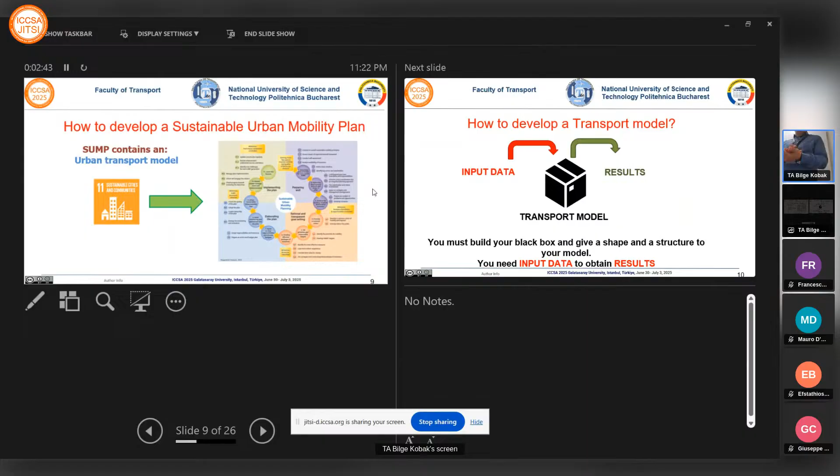How is this kind of strategic document developed? There are four steps. First step is preparing, to identify action and goals for sustainable urban mobility plans, to elaborating the plans, which include normally a transport model, because if you want to test some action, some measure, the simulation model is a good tool, because it's better to know what happens if I build a new trip in simulation like in reality, and to implementing the plan.

But to develop this transport model, I need to use our mathematical knowledge to write the relation, to calibrate data and to obtain the results. But the most important is to have some good input data, because if you have good input data, also results are good. But if you have bad data, the results are certainly bad.

So which kind of data do I need normally? I split it in two components. Static data, and we can obtain information from national, regional, and local authorities. I need information about public transport, and of course I can use previous studies to collect this kind of information.

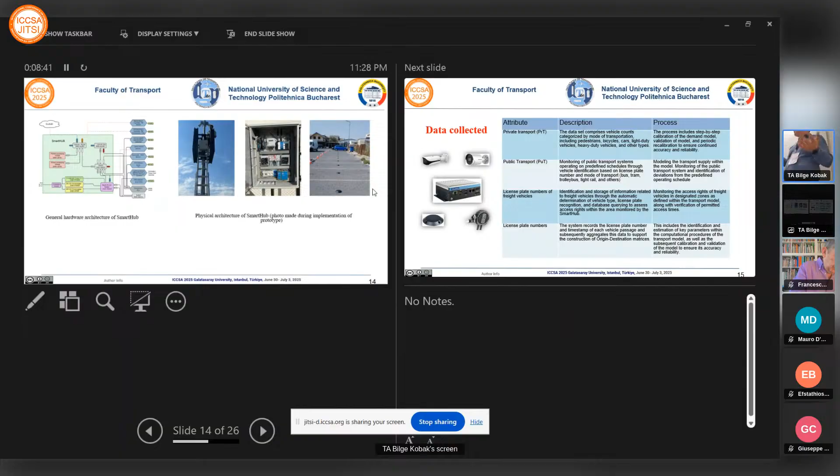Which data do we collect? We collect data about private transport: counting how many cars, bicycles, and private vehicles. Data about public transport, because I want to know when the bus arrives, if it's on time, delayed, or early. We also collect the license plate number of freight vehicles, since sometimes there are restrictions, and I want to know if vehicles respect them. The equipment can also pair license plate numbers to obtain an origin-destination matrix, to calculate travel time, and to see congestion or delays in traffic.

We also have statistics for a sustainable urban mobility plan for medium cities located near Bucharest, where our project was implemented. We built the transport model, developing a network model, demand model, and impact model.

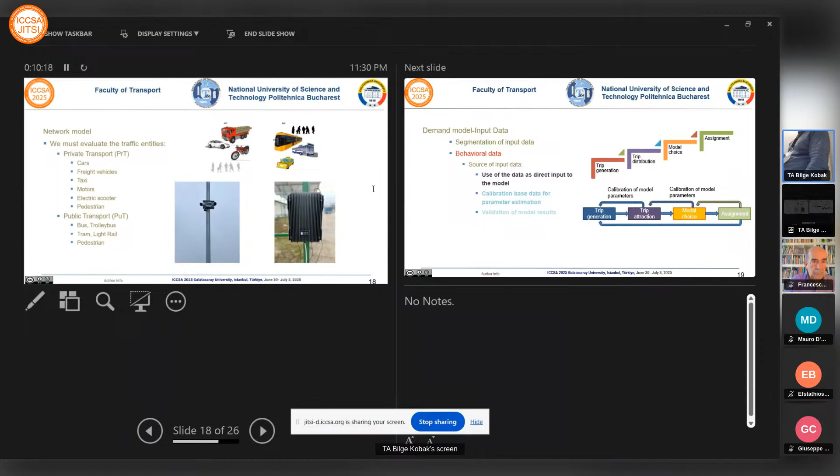We classify vehicles into private transport — car, private vehicle, taxi, motorbike, electric scooter, pedestrian — and public transport. The demand model was a typical model in four steps: trip generation, trip distribution, modal choice, and assignment.

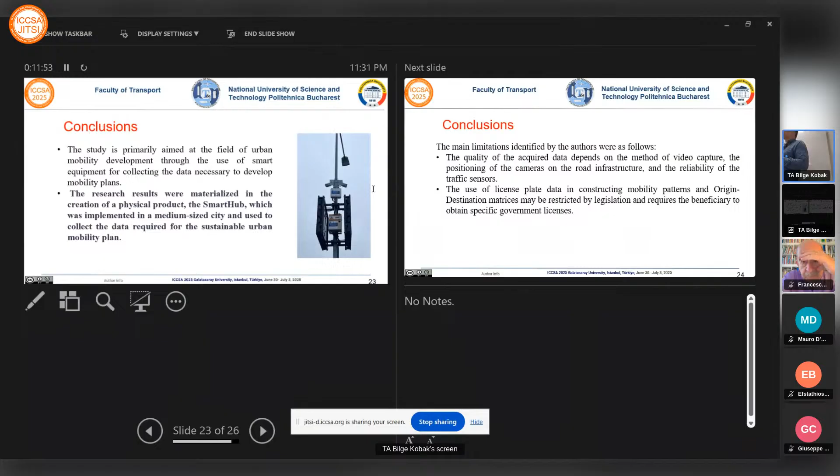Some conclusions: innovation appeared in our research because recently the rise of artificial intelligence helped us develop new technology. The most important outcome is the research results — we obtained something physical, this equipment, and we can use it.

Of course we have some limitations. We observed that it's very important how you position the camera in traffic, because if it's not well oriented, you can have errors. Weather conditions can also affect recording.

Something special — I don't know about other countries, but in Romania, collecting license plate data isn't easy; it's not legal without authorization. You must obtain a document from the authority. And when we publish the results, we anonymize the data to hide the plate numbers.

Future research will focus on developing a dynamic model for traffic monitoring and control. We want to export the results to a system that can control traffic light intersections, so we can optimize the traffic flow. Okay, thank you.

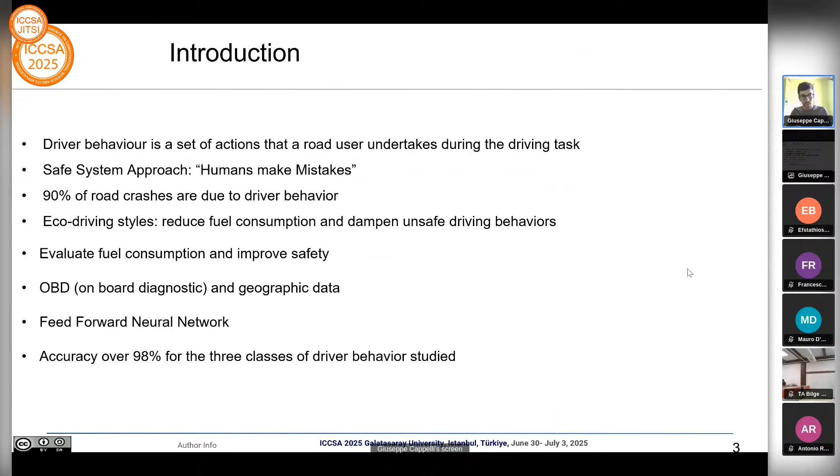The first step in this methodology was to select the best dataset to use. After studying and reviewing the most used datasets, we decided to choose the Davis Driving Dataset 2020, because it contains almost 51 hours of driving recordings over 4,000 kilometers of driving. Another advantage was that all this data was georeferenced, so we also have GPS information on the data collected during this experiment.

In this slide, I show the main variables retrieved from the OBD data in the Davis driving dataset: engine speed, brake pedal status, accelerator pedal position, vehicle speed, and so on. This dataset was the largest available, and also contained georeferenced information, which was used to combine this dataset with external information retrieved from OpenStreetMap, for instance.

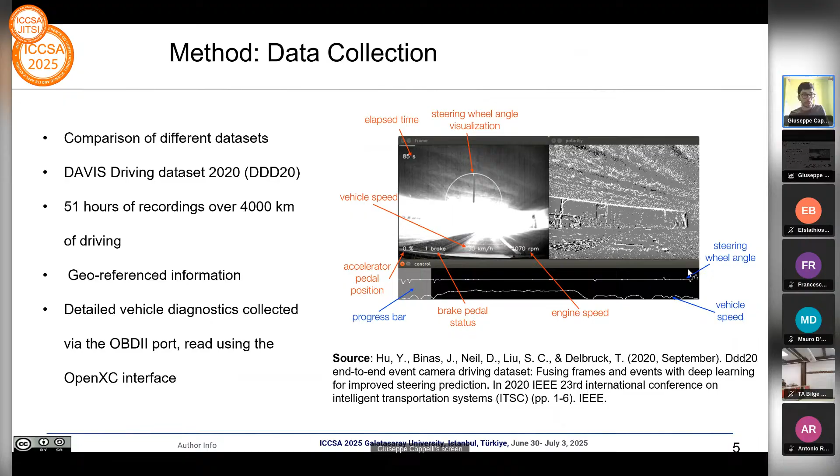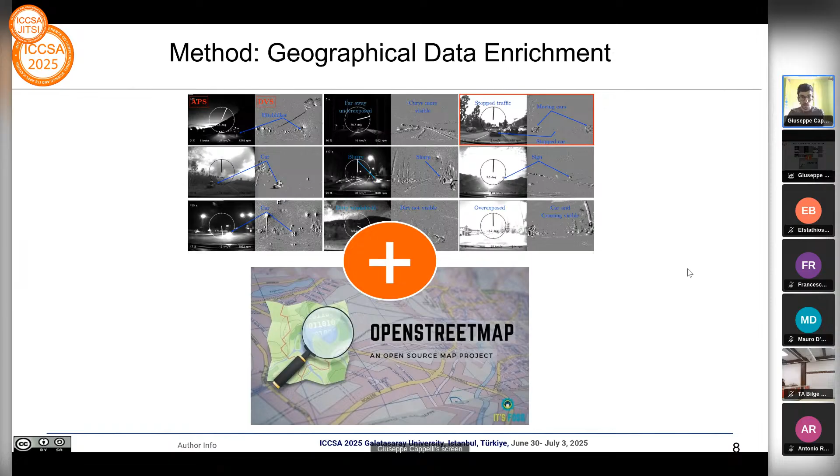One of the main and important steps of this methodology was the geographical data enrichment. We tried to merge data from the OBD with OpenStreetMap data, because the aim of this study and paper was to understand the role of the external environment on driving behavior, which was an essential part of this research.

After that, we trained and tested a multi-layer perceptron neural network, an artificial neural network that works by emulating the brain's neural process. With this model, we were able to classify driving behavior according to the three classes identified with the k-means algorithm, and we saw that the performance of this model was very high.

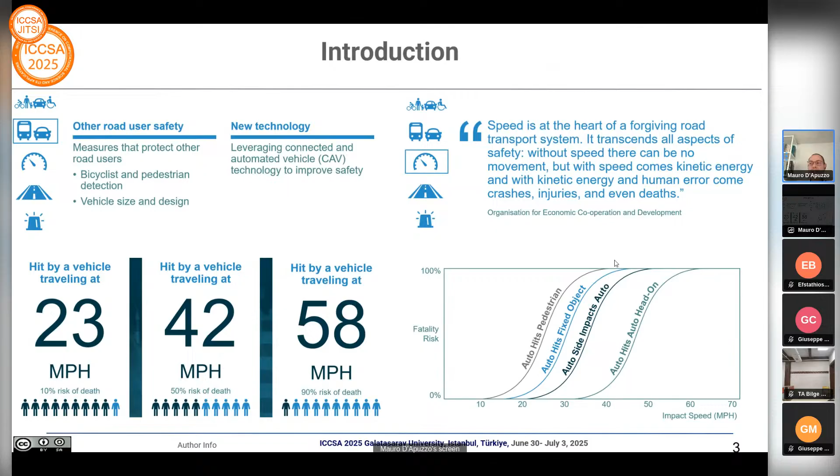According to the impact speed, you have an increasing severity and death risk when a vulnerable user, a pedestrian, is hit by a vehicle. Usually we develop severity curves, like those shown on the right part of this slide. As you can see, there are several severity curves according to the crash scenario we are focusing on.

When you want to mitigate speed in urban areas, you can have different tools and measures. You can foster sustainable mobility, set up cycle lanes and so on. But in a more traditional approach, you can use typical traffic calming measures. Among these, we can identify horizontal based traffic calming measures, such as chicanes or road narrowing, whereas we also have vertical based traffic calming measures, such as road humps, speed tables, or raised pedestrian crossings.

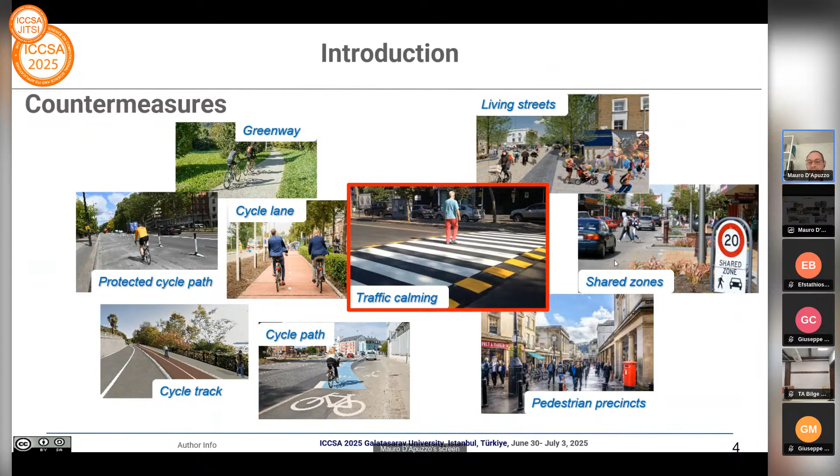Or you can have perceptual traffic calming measures, such as optical bars and so on. We want to focus on vertical traffic calming measures, and more specifically on raised pedestrian crossings. The interest for this specific measure is that in Italy, according to Italian rules, this kind of traffic calming device can be installed practically everywhere, compared with speed humps, which undergo some installation restrictions. Speed humps can only be installed in residential areas, whereas raised pedestrian crossings can be installed practically everywhere.

Our research study starts from analyzing the dynamic interaction that a vehicle experiences when crossing a vertical traffic calming device, such as a raised pedestrian crossing, analyzing the vibration level that the driver experiences, since this vibration comfort will govern the vehicle speed when crossing the traffic calming device. So we developed theoretical dynamic models in order to identify the acceleration history in terms of vibration and comfort that the driver is experiencing.

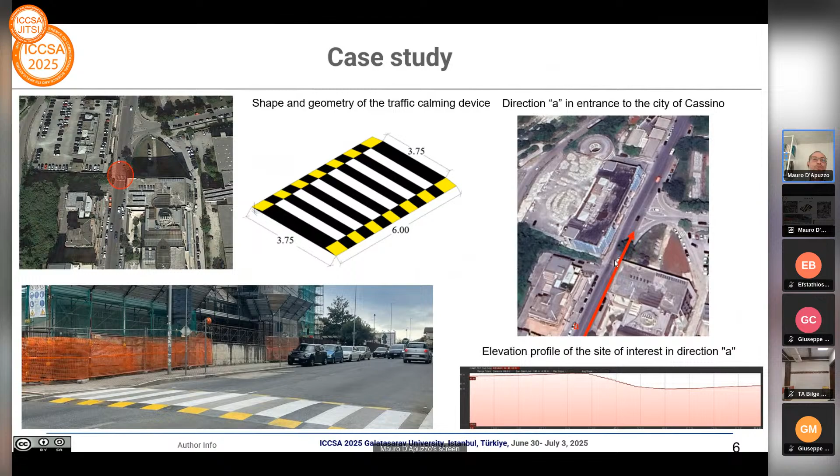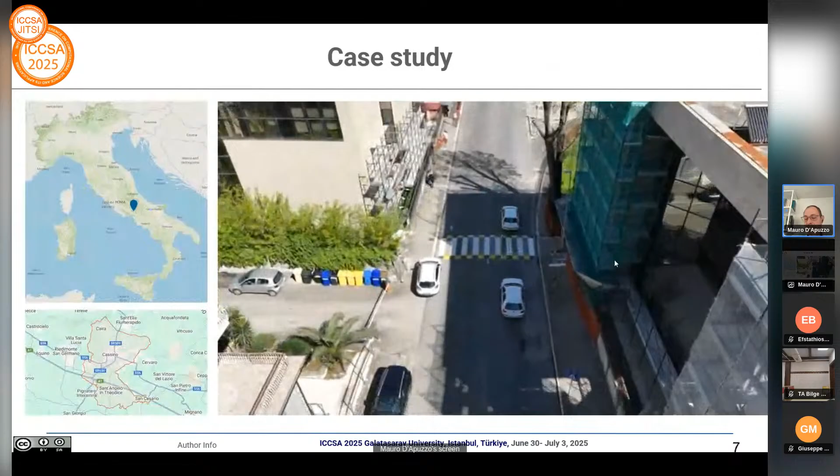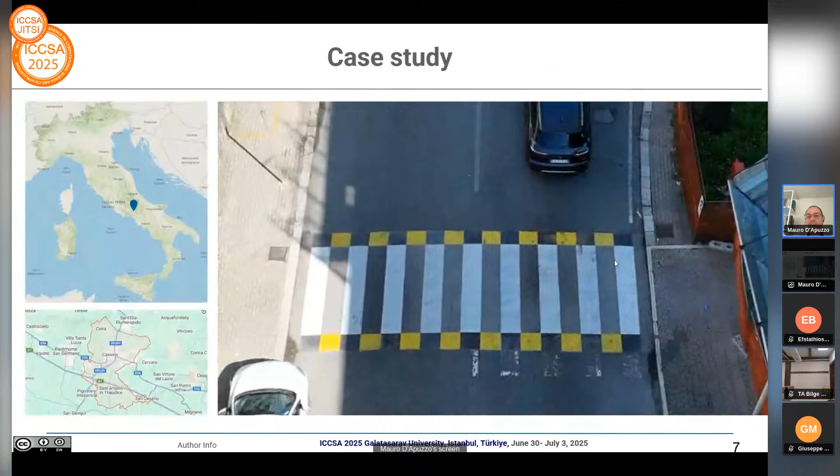As a matter of fact, as I told you, we are talking about a raised pedestrian crossing. So we need to look through some experimental data to gain evidence of this different behavior. We monitored a raised pedestrian crossing close to our engineering faculty, recorded in this video. We are in the central part of Italy, in Cassino, and this is the raised pedestrian crossing we are monitoring.

We collected the speed profile of vehicles crossing this pedestrian crossing, and we filtered the speed profile, taking into account only what we call isolated vehicles, because the crossing speed can be affected by traffic flow. So we need to identify and highlight only isolated vehicles, vehicles that are far away from the following one in the traffic stream.

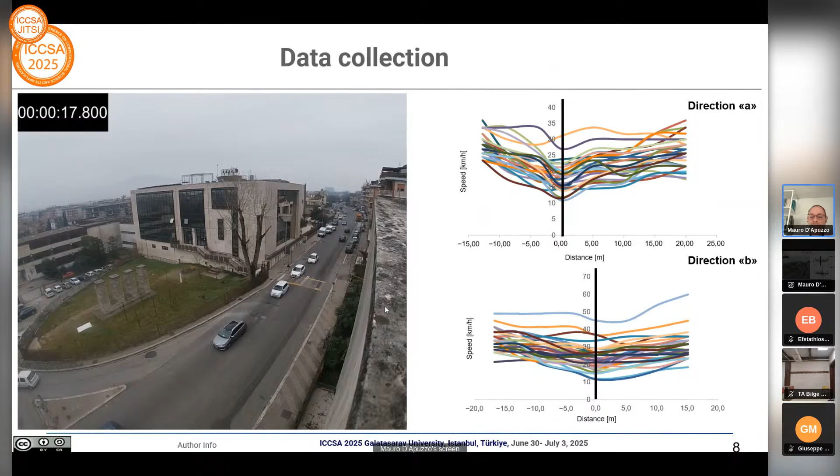As perhaps I did not highlight, we consider three main categories for the vehicle: a typical sport utility vehicle, a typical sedan, and a medium-sized car, that are the most common vehicle categories traveling on our roads in all Europe.

Then, obviously, as far as the first step phase of statistical test, we verify the independence and the normal distribution of the data and the homogeneity of variance.

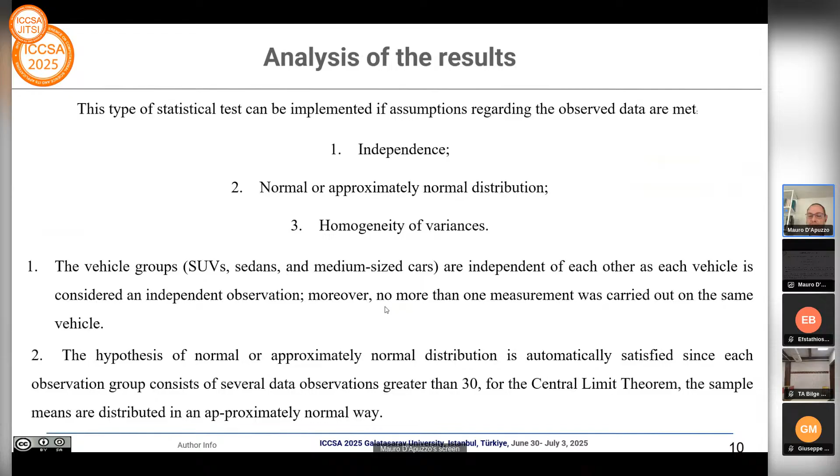Following this test, we perform, as I told you, the student t-test, comparing in pairs the different speed profiles, especially the crossing speed, on which we are obviously interested. And the student t-test also provided us a good response.

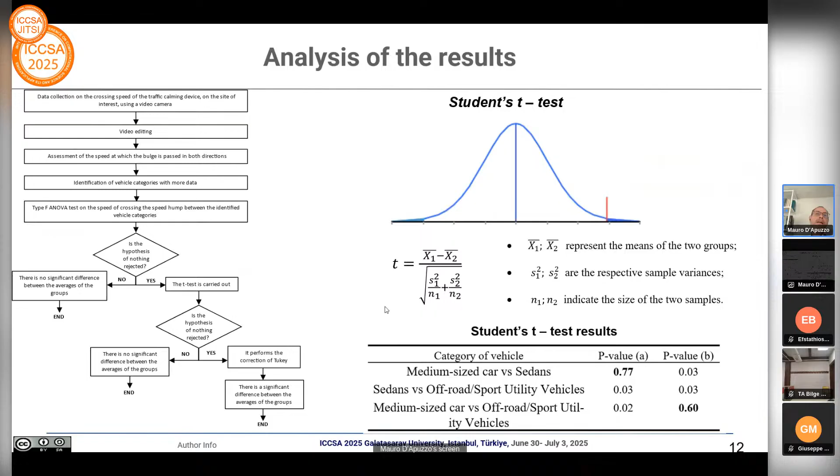Most of the pairs show a statistically significant difference in the crossing speeds among the different pairs compared.

Conclusion: the study conducted showed how the category of vehicle influences the extent of speed crossing the traffic calming device, confirming the initial hypothesis, and highlighting a statistically significant difference in the crossing speed of the traffic calming device as the vehicle category varied.

An ANOVA test was first carried out, which showed a statistically significant difference between the vehicle categories analyzed. Therefore, it was possible to subsequently implement a T-student test that identified the pairs of categories with the most marked difference in terms of crossing speed.

Finally, obviously, a Tukey correction excluded the risk of type 1 errors, consolidating the reliability of the results and strengthening the interpretation of the observed difference.

These results have important practical implications on the design of traffic calming devices, as currently most speed humps and raised pedestrian crossing speed tables are designed according to uniform criteria, without considering the difference in dynamic behavior of the various categories of vehicles.

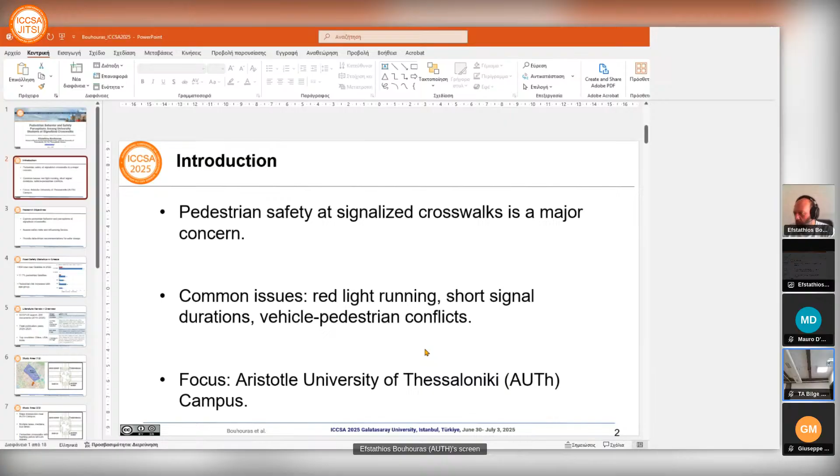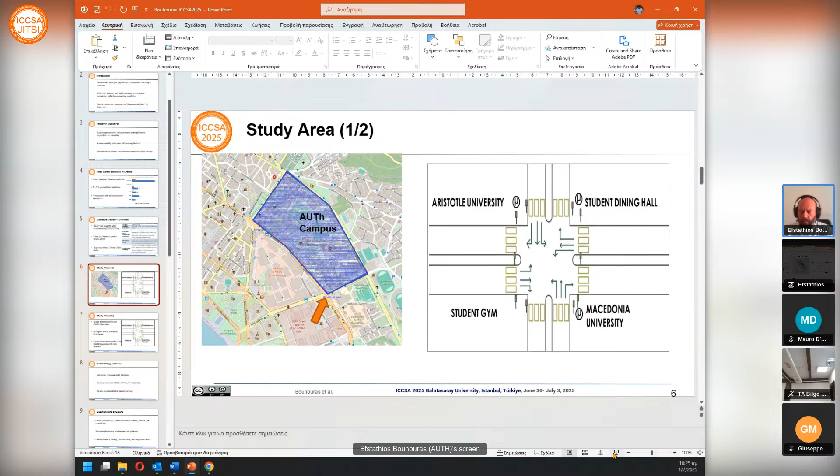Okay, I was presenting this slide - you can see now the AUTH campus, hopefully. I will try to go to presentation mode, please inform me if you can see the slide. Yes, we can see the slide with the campus map. Okay, now this is the AUTH campus, the highlighted area, and the arrow points to the cross-section where we conducted the questionnaire-based survey.

The survey was conducted in situ with two students in the framework of their undergraduate thesis. Here you can see the layout of the cross-section with the traffic lights and the movements, the direct movements, and the movements in general of the vehicles.

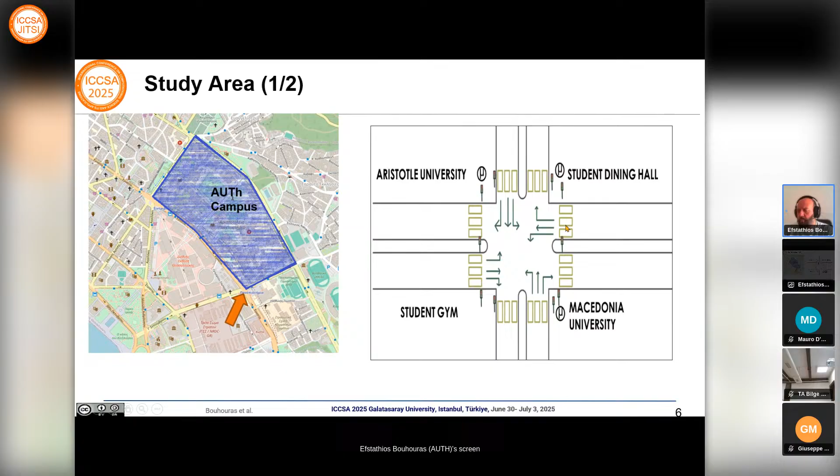It is a major intersection at the borders of the AUTH campus. As you can understand, there are significant pedestrian flows coming to and leaving the university. This road is Egnatia Street, a major artery in the city, with 3 lanes per direction, divided by a median with a bus lane. The vertical street is 3rd of September Street, with 2 lanes per direction, also divided by a median. And you can see the traffic lights.

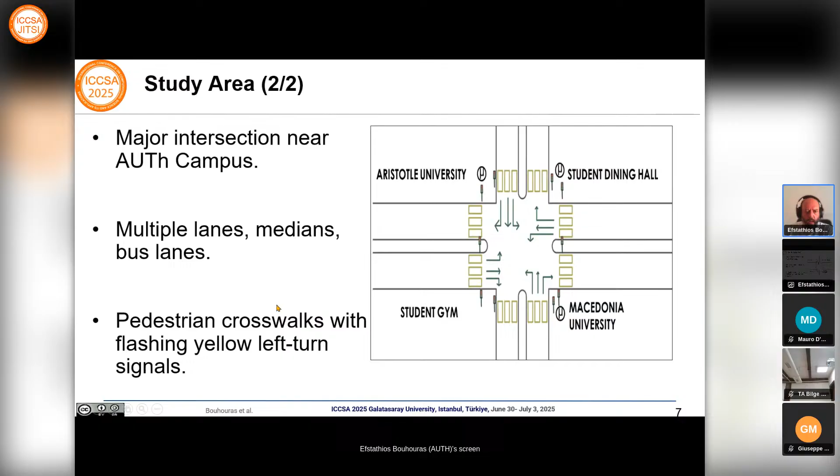And these are the entrances and exits to the newly operated metro line of the city. Now, the survey was conducted in January 2025. We had just over 300 questionnaires filled.

As I said, it was an in situ questionnaire-based survey. The students conducting the survey were at the intersection, and when a pedestrian crossed the crosswalk, they conducted an interview with a random sample. The questionnaire had two sections: the demographic section and the crossing habit section. The first had 6 questions, the second had 14 questions.

We tried to identify their perceived level of safety crossing the streets, the distractions, and their proposed improvements. Regarding demographics, the majority, as expected, was under 24 years of age. The students managed to have a rather good, balanced distribution regarding gender, and we had mixed income backgrounds and car usage in our sample.

Regarding how they usually cross the street, using the crosswalk or not, you can see here the result: 60 of them do not use the crosswalk. From these 60, you can see in the lower chart how the perceived level of safety is recorded. Half of them feel moderately safe while crossing the street outside of the crosswalk.

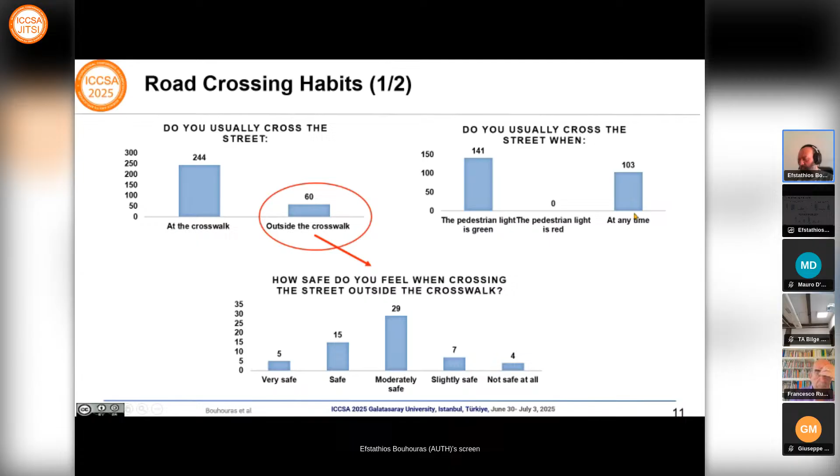From the 244 students using the crosswalk, you can see on the right figure that almost half of them cross the street when the pedestrian light is green, but over 100 of them cross the street at any time, which is, of course, very disturbing and alarming.

Regarding the factors influencing the students' decision to cross the crosswalk, in this question they had the ability to give more than one answer from those provided. 145 mentioned they are influenced to cross if another pedestrian starts crossing the crosswalk. 135 mentioned the indication of the traffic light, which should be a higher value. And 104 mentioned the speed of the passing vehicle.

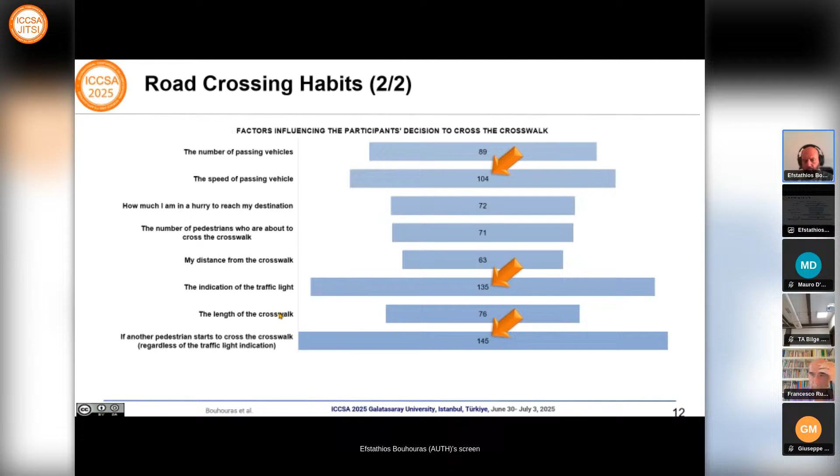Now, let me say this. On this cross section, while pedestrians are crossing the crosswalk, vehicles turning left have the ability to cross at the same time, because when they approach the intersection, the traffic light they see is a flashing yellow arrow, which according to the Greek driving code allows them to turn left, but at the same time obligates them to do so cautiously and provide the right of way to pedestrians. This means pedestrians cross the crosswalk while vehicles are turning left, so there is the possibility of conflict between vehicles and pedestrians. However, the Greek driving code makes it very clear that drivers must stop and provide the right of way to the pedestrians.

Regarding what makes the students feel most insecure when crossing the crosswalk, again they had the ability to give more than one answer. 104 of them say it's drivers running the yellow light, which is normal to feel insecure about when you see a vehicle coming, and also the simultaneous passage of vehicles and pedestrians, which is quite relative.

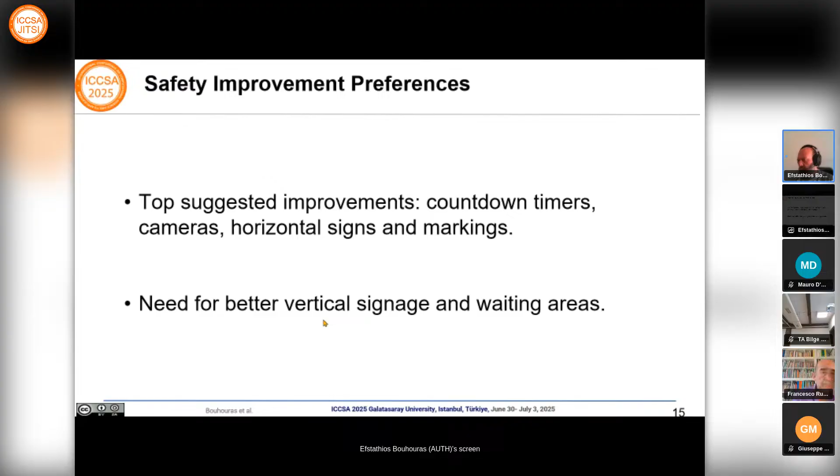Now, we asked the students to propose improvements on how to improve the safety level of the intersection and the crosswalk. The first had to do with the installation of countdown timers for pedestrians. Also cameras to monitor pedestrian and vehicle movement, horizontal signs and markings for pedestrians, the necessity of better vertical signals for both pedestrians and vehicles, and waiting areas where pedestrians can wait between traffic lights.

Concluding, we found that group dynamics affect behavior. We saw that students are affected when someone else tries to start crossing the street. Awareness doesn't always ensure compliance - they know they don't feel safe, but nevertheless they cross the street. Distraction and urgency are key influencers for their decision to cross, and they value safer infrastructure and enforcement based on the proposed measures.

Countdown signals are highly appreciated by the students of the Aristotle University of Thessaloniki, and time-sensitive behavior requires more attention from all decision makers. We know the limitations of our approach - it is limited to the students of the off-campus and at one intersection, and we want to expand our research to other demographics, other intersections, and other cities, and test the effectiveness of the proposed interventions.

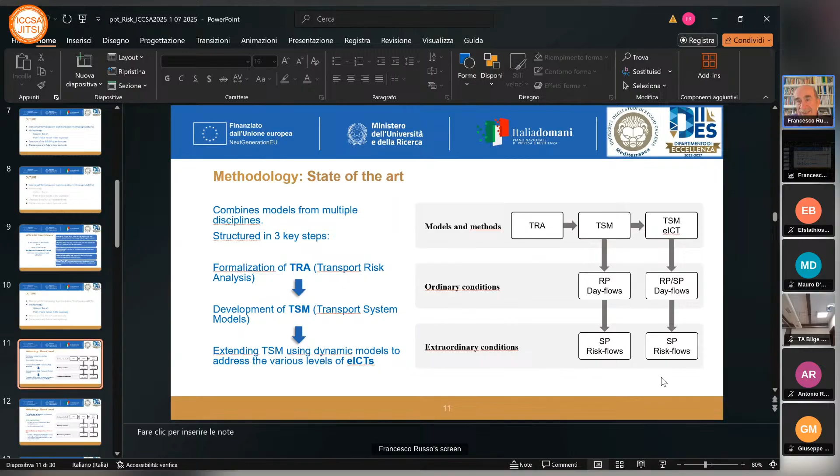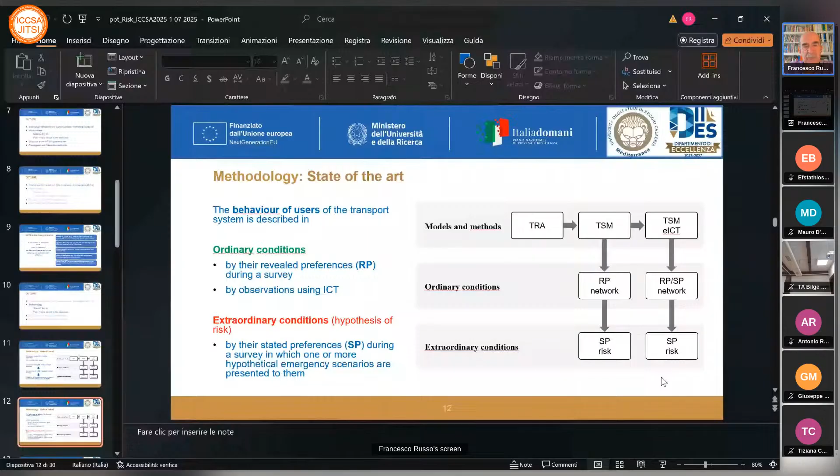For TSM with eICT, in ordinary conditions it's the very ordinary research, the very ordinary sample, the very ordinary interview that you can make. In extraordinary conditions, it's important that you use stated preference, because only stated preference can present the extraordinary condition to the user. In this case, the formulation is the second part of the methodology.

Transport risk analysis has this very diffuse formulation, where the risk equation derives from three elements. The first element is the occurrence, relative to the type of event and its propagation in terms of effect. The second element is the vulnerability. The third element is the exposure.

In general, occurrence is studied by different bodies of the state, for example secret services for terrorist attacks like the Twin Tower, or meteorological agencies for problems of storm, rain, great rain, and so on. Vulnerability is specifically studied by researchers on infrastructure, on structure, on different mechanical or geotechnical elements.

The third part of risk, exposure, is very little studied, because exposure, as I said before, for example in Europe or in Italy, is studied just in terms of what to do after the disaster, after the deed, after displacement, and so on.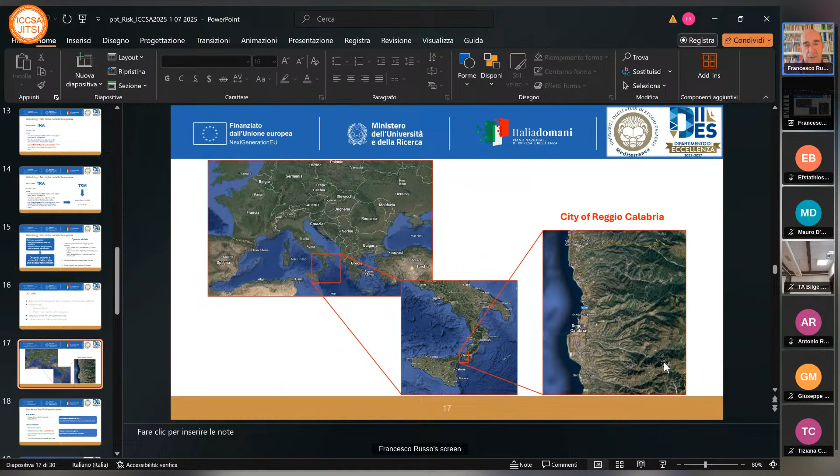In this case, we consider fixed the emergency occurrence. We consider a violent storm with flooding risk. We consider the condition of vulnerability fixed, and this is the element exogenous to our questionnaire. We tell the reviewer: this is the situation, you have a violent storm and a specific condition for the infrastructure.

The element we ask explicitly to the people is a first level, basic risk. You say, for example, in the network, what do you do, how do you choose the path to use to arrive at the safe point? The second type of question is: you have a risk, but you know what happened in different paths in the network, and then you can choose not only with your historical information, but with the information that arrives from all the network in this moment.

The third element, and the third part of the research, is to give information from the other links in the network, from the other part of the network, about what happened in the next period, and then about the link that you can choose.

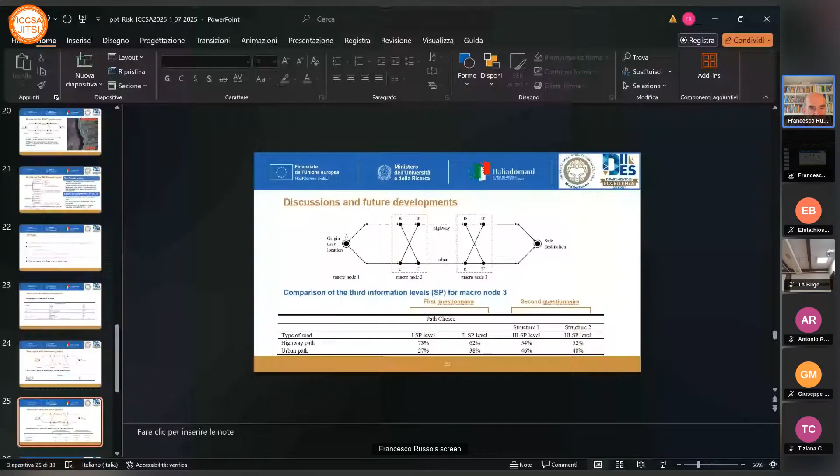The questionnaire 1 is relative to... and this is the very first result. You have my last slide where you can read the comparison of the third information level. This is the third one.

In this case, you can see there are different results. The first result is for the stated preference level 1, where you don't have information about emerging ICT. With the second SP stated preference level, we have information just about big data. With the second questionnaire, you have information about the introduction of IoT, and with IoT you have different elements with different conditions that you can consider.

Okay, in this case we can arrive at the last slide, where we have future developments.